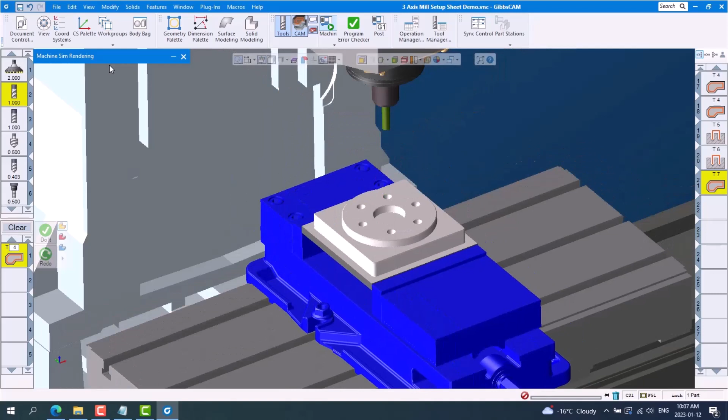In this tech tip, I'll show you how to produce a setup sheet from GibbsCAM that you can use to communicate with the shop floor to avoid costly downtime during setup. Downtime can happen when the setup person is searching for things like material, tools, holders, programs, and fixtures that were included during the programming process. Setup sheets are an important communication tool between the programmer and the shop floor.

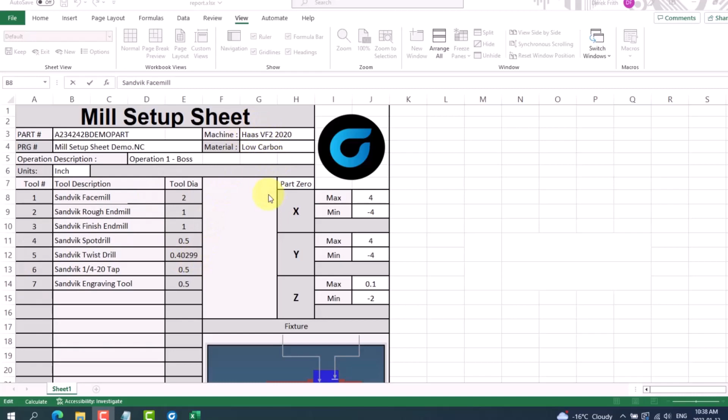Next, I'll show you the types of information you can include from GibbsCAM and how to customize the look of the setup sheet, which includes your very own company logo. Some examples of information you can include directly from GibbsCAM are part number, G-code file name, the operation description, units, tool numbers, tool descriptions, tool diameters, the machine, the material, part datum, fixturing, and an actual picture of the part.

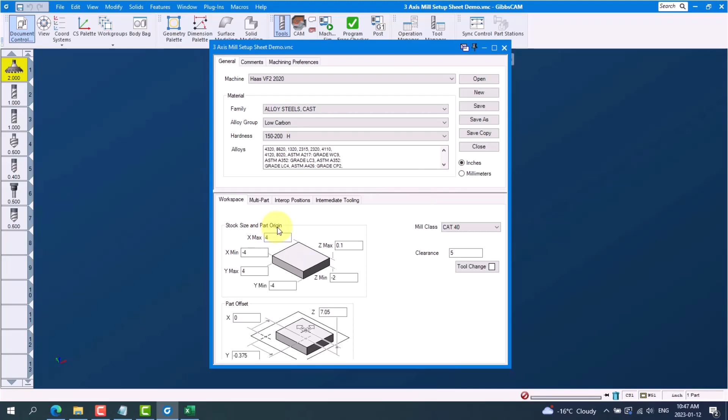Next, I'll show you where this information is coming from in GibbsCAM. If we look at our document control, this is where we get our machine, material, units, part, stock size, and origin. And if we go to the comments tab, this is where we get the part number and our operation comment.

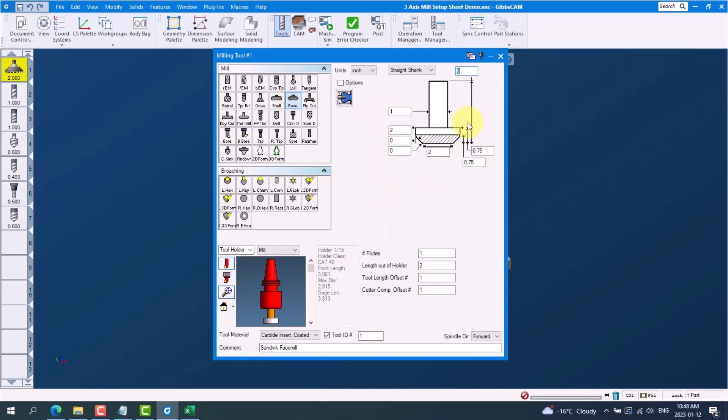Next, if we look at a tool, this is where we can get our tool number, our tool comment or description, and our tool diameter. Other information can be added to the setup sheet as it is fully customizable.

With a report like this setup sheet, there are two files required: an Excel file and a text file with the same file name. We have provided a setup sheet template. You can download the two template files in the description below and drag both of them into the report folder on your workstation shown here.

Here the two files are in the downloads folder. Now I'll show you the file path: C drive, Program Files, Cambrio, GibbsCAM, the current version you are using, plugins, data folder, report. You can copy the two downloaded files, the Excel file and the text file, and drag them into the report folder.

You will need to provide administrator permission to move to this folder. Click Continue, and continue for the next file. And if I open the report folder, my GibbsCAM setup sheet is in there.

The Excel file includes the layout and look of the sheet itself, including titles and pictures such as the company logo. I'll now show you how to personalize it by copying your own logo into the setup sheet.

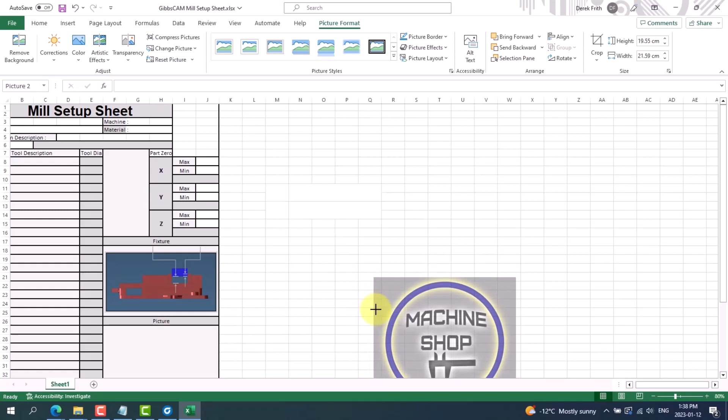This is the space here that I've set up to copy my logo into. So I can go up into Insert, Pictures, from this device, and I've saved the logo on my desktop. I can go to my desktop, choose my logo, and insert it. It'll be inserted into Excel, which I can resize and simply put into place like so.

Once I have this logo in place and I'm happy with the look, I can save it. Go to File, Save. We now need to close Excel to allow us to copy the file over.

I'll copy the file from my desktop and I'll just drag and drop it back into the report folder. It'll again ask me to provide administrator permission to move to this folder. Click Continue, and we can see now that our setup sheet is in the proper report folder.

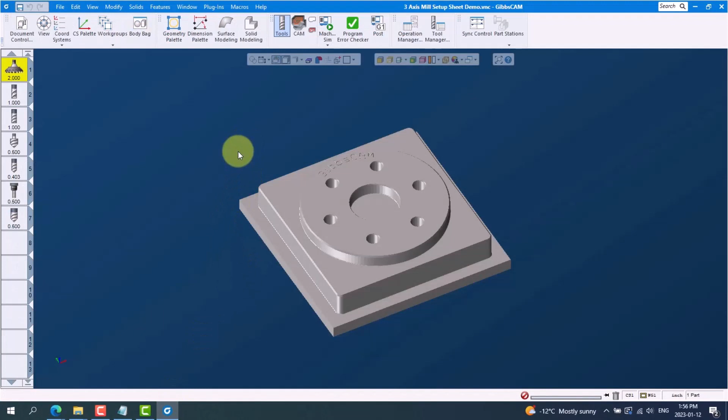Now we are ready to go back into GibbsCAM and follow these steps to print. We need to go to Plugins. Under Main Tools, we go to Reporter. Click on the Custom radio button, find our new setup sheet in the list below, and press OK. GibbsCAM will load Excel and produce a ready-to-print setup sheet.

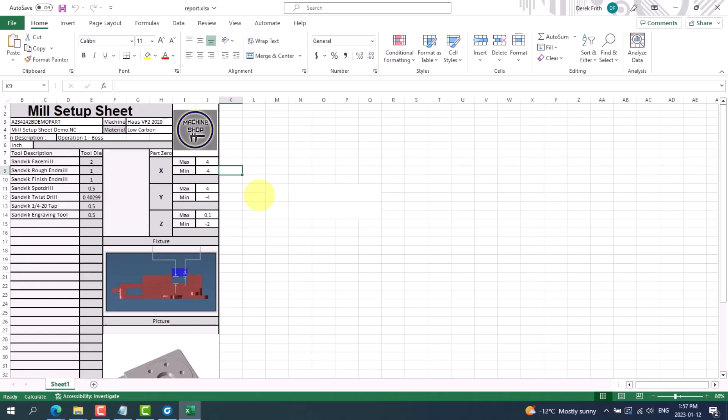This can now be printed and handed over to the shop floor. Go to File, Print.

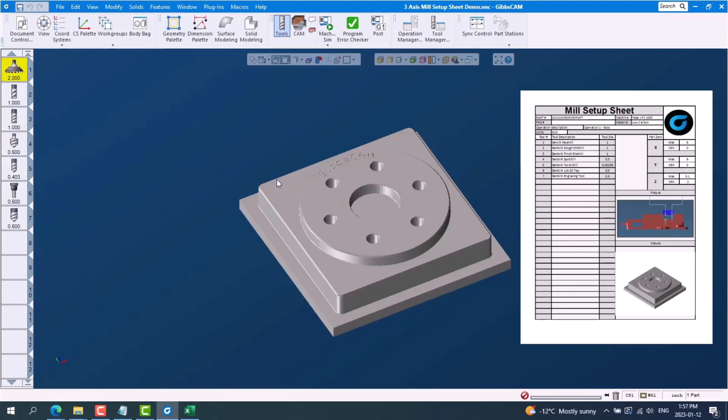Creating these custom setup sheets will help you bridge the gap between the programmer and the setup team, ensuring a smooth transition from GibbsCAM to a completed part, which saves valuable time. If you would like to learn more about creating or modifying a setup sheet, please reach out to your local GibbsCAM reseller.